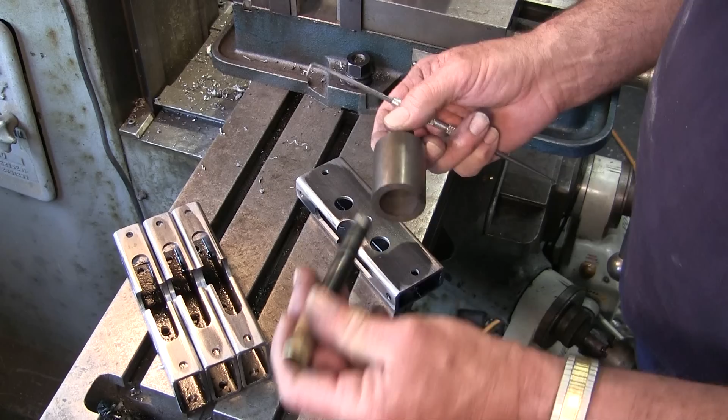Okay, we got a couple things going on here. It's basically a transfer punch with a sleeve I made up for 5/8, and this is a piece of 1.5 that I used for something else, and it just happens to work out fine for us here. What I'm doing is scribing out a line that I'm going to hand sand these to.

We could put these right on a rotary table and over-engineer this radius, which is just clearance for the bearing. The bearing will be sitting proud of the top all the way there, as long as we give the 3/4 inch radius, and that'll be done just by hand.

So to sand all of these, I come in here and scribe a radius up here. All I need is partially on this curve right here, and then here, and then I'll be able to sand that right on my Wilton sander. I'll do one side and then the other side.

What I do is mark these up with a line that I can scribe to. Now I come in and sand one side, flip it over, and do the other side, but I want four lines so that I've got references by eyeball.

So I'll get all these scribed up, and then we'll go into the Wilton, and I'll show you how I sand one in. Of course I've already done one, and this is what it's going to look like when it's all done. Then we've got just some slight deburring on the inside, and this carrier tube will be ready to rock and roll.

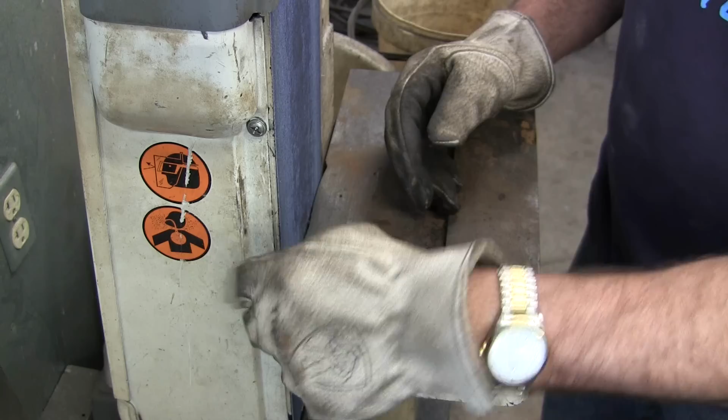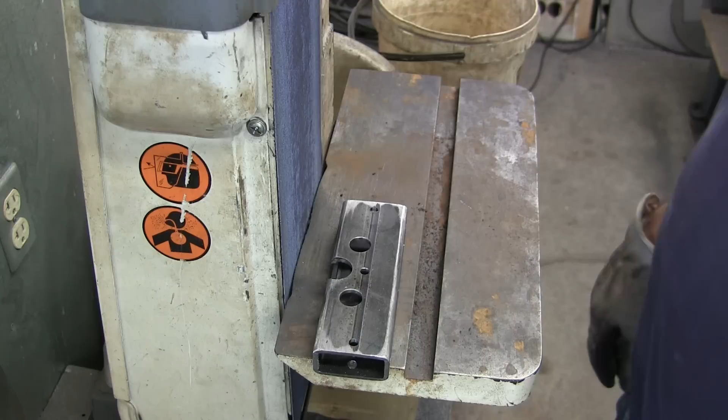We're at our Wilton, and we tracked the belt so that we're all the way over close to this edge here. We're going to take and work in here, flip it, and work until we blend that radius right into our scribe lines, and it looks really good by eye to us.

You hit a little bit there, and then when you flip it over, you're able to reach in a little bit farther for the other side.

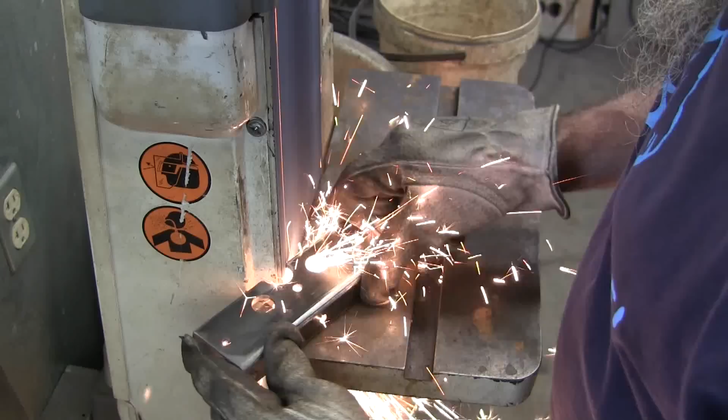You just make sure that you're not tracking too far with your belt to where you're cutting into your side cover.

I don't normally wear gloves with the Wilton here, but the hot sparks and heat of the tube really does get going, so I'm keeping them on for protection here. You can wear gloves or not, it's up to you. It's not always the brightest thing to do, but you know when you're going to get your hands in there close.

Now once I have it like that, there's still just a little tiny peak here and there, and I want to blend those in with the hand sander.

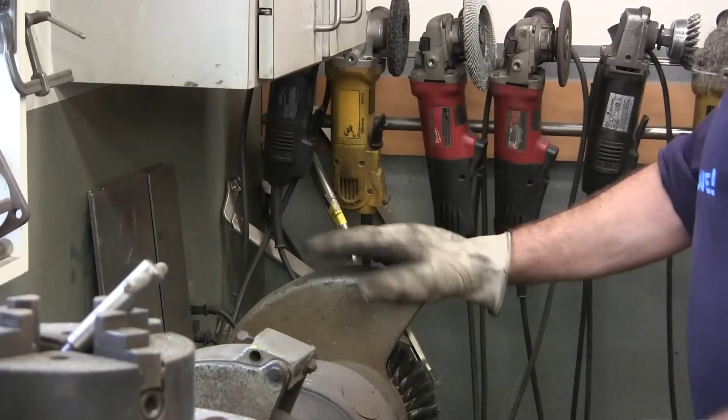Sometimes I use the top of this just for a resting point like this, and I can grab my sanders that I've got over here, and this happens to be plugged in already.

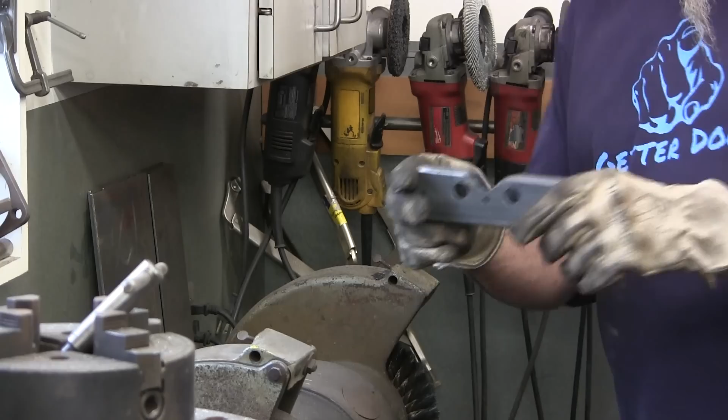Just a little massaging until it looks like a nice curve. Alright, we still got to deburr the inside and that.

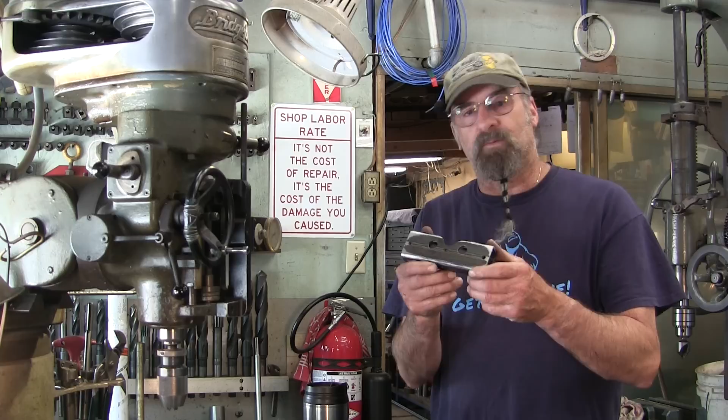We're running out of time. We have a lot of other things coming in here, and we're trying to carry as many jobs as we can, keep things going, but we're still getting ready to send these off to Stan's place there for the summer bash.

All right, I've got a couple parallels in here. I've already kind of gathered up all my stuff to get ready to go here, so I am a little bit prepared, but I want to go through how I did prepare.

We have a couple parallels set so that I got the height. I'm comfortable being able to grab the top of this part with my fingers, and enough is held in there to hold the part. Now we want to hold this off the end there, and I don't have one of the little short block stops that normally clamp on here for a mid-vise stop.

So this stop here is actually set with a rod that's not going to reach all the way over there. What I really like to use, since I've had these, I stopped searching for that little block, because I have various sizes of these machinist clamps. What I do is take the clamp, lay it down, slide it up there, and tension up the clamp.

With the two rods right on top of there, you're keeping it parallel so that face on the end is going to stay square. And then I take one of these screw-in scribes that used to have the end on it, and you snapped off, and I use that to throw on there.

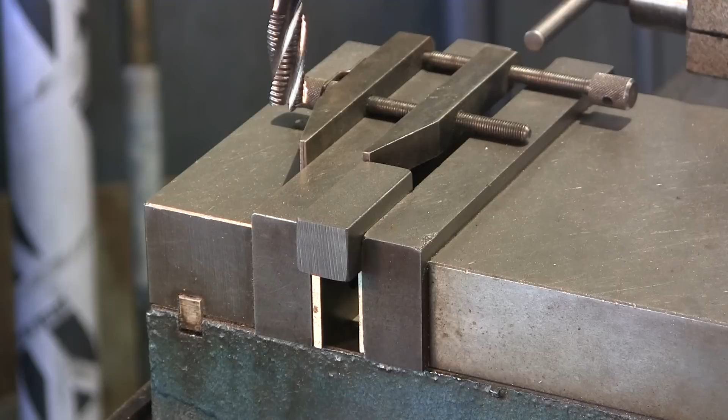That's good. Okay, let's reposition you because we're just going to get in here. We're going to be doing some facing off on these squares here. Okay, we're all set up here now. All right, we're going to turn our spindle on. We're going to come down.

There's 153, 152. All right, so what we're going to do is we're going to touch off. First off, we're just going to quickly measure the one we have in here. And we're about 920. Okay.

So we're going to touch off on it, and we're just going to feed back here. What we're going to do is set it up so we have something we can judge. That was 920, we'll put in 0 here. And let's go ahead and we can take 100. All right.

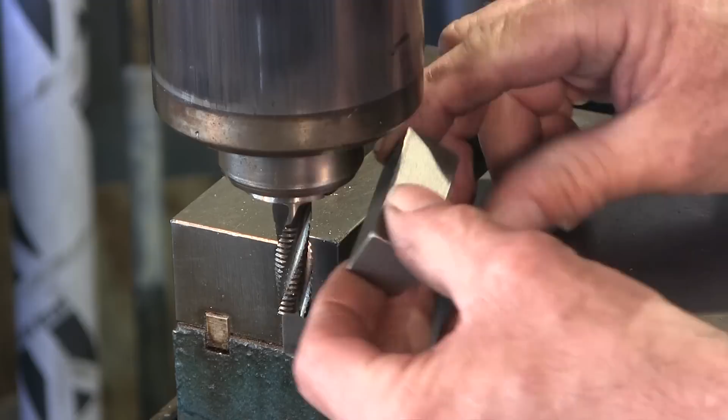So I'm going to run all of these through this process here. Just a little bit of air in there — that's another nice reason to have the springs in there. They hold it when you hit it with some air, so the parallels don't tip over, fly up, lift up, and let chips go underneath.

We're going to continue going through all of these and hitting this one side here. All right, we've got our 12 pieces set up here, with the pre-machined surface all facing up, so that when we grab them, we're making sure we have the finished side here and our saw-cut side out.

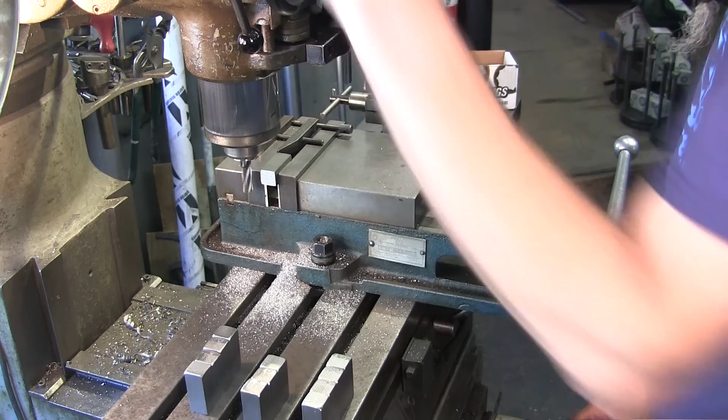Let's go ahead and take a cut, then we'll take a measurement. We're still at that 1 inch 820. I'm just coming in, barely touched it — 820, and we said 825, so there was about 75 thousandths to go.

I'm going to crank in 60, about 10 away from what we project it's going to be. Let's take a cut across here and then we'll measure it and see what we got.

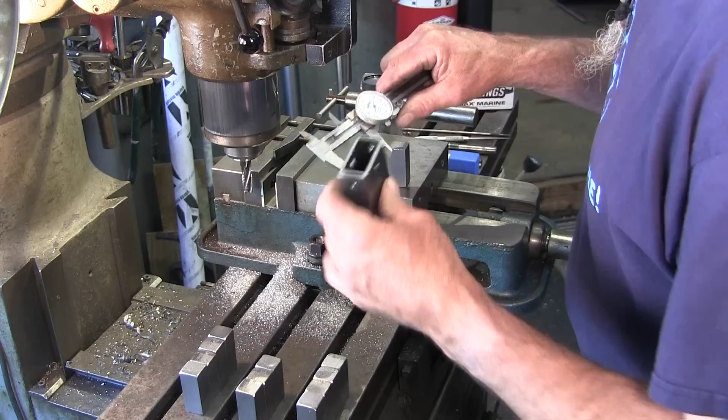We got 1 inch 768 or so, so there's about 18 thousandths we need to take out of here, but maybe not quite that much — this is measuring about 5 thousandths over 1 3/4. I think we'll take 10.

What did we say this was? 8 — let's take 14, we'll see how it fits in there. All right, there's the 14.

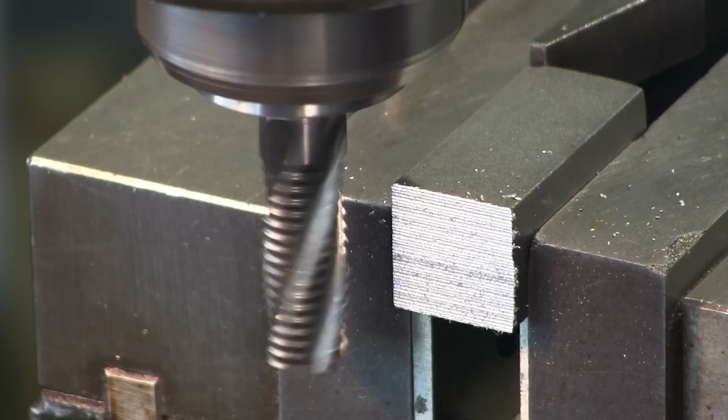There's 754, 754 — let's just see if it fits in there, and I'm getting it to dip in. That's going to be good. I'm going to go ahead and call that zero, and I'll cut them all to that length right now.

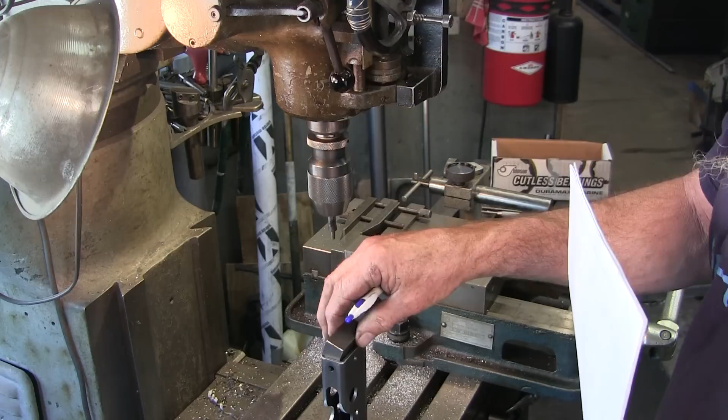We're ready to go for the next operation. They're at length, we get them to fit inside the edge of the box tube here. They don't have radiuses on the corners yet, so they can't slide in there, but we'll do that after we put the holes on them, since we're still using a sharp corner to locate this part.

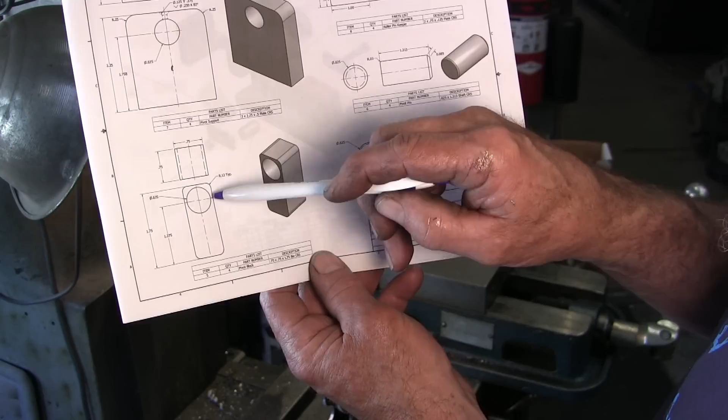We want to put the 5/8 hole that goes through, right here, 1 3/8 up from the bottom, with about 1/16 of an inch of material on each side around these three points. We have to be conscious of our parallels under that part, because that 1/8 inch is going to come down and grab those parallels, so I'm going to push the parallels back in there a little bit.

So it'll still locate the part. Now I'm going to go ahead and pick this up just to make sure that I am back out of the way. And I'm going to go ahead and open this back up again once I locate my hole. All right, now I got a wiggler in here. Let me see. A little bit fast.

Okay, there we go. All right, let's come over here to the back side of this project here. I'm already dialed in 3/8 of an inch in from the jaw face, and we're going to stick the wiggler down in here, and then we're going to go ahead and come out until we kick. There, we kicked.

We're going to zero that, and then do a retest. And it's zero again. Okay, that's a 200 thousandths tip, so we're just going to move it 100 thousandths and then re-zero it.

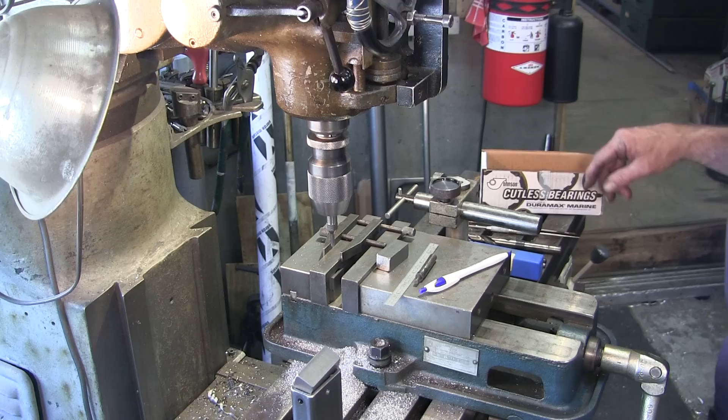All right, now let's go ahead and we want to make sure that we're clearing a 5/8 diameter down in there. I have the clearance drill here, and we can stick it down in. We know that we're about 1/8 of an inch away from our parallels, and this drill bit is pretty close to the 5/8, so we're going to have plenty of clearance there, and plenty of parallel to actually hold that down. The vise is going to hold that thing from twisting and cocking.

All right, now we're ready to go ahead and start putting in our hole in here. And I'm going to go see if I can hunt up my tight reamer again, and if I can, that's what I want to put in there, because to be ideal, the round axle that will go down in there—the trunnion pivot—if that presses down in there, it's going to be a better product at the end.

Okay, we've finished drilling all the 1/4-inch pilot holes, and now we're going to put in the next size drill. We're going to lower the table down here. Okay, and we're going to have to slow down our speed here. I think that's going to be good.

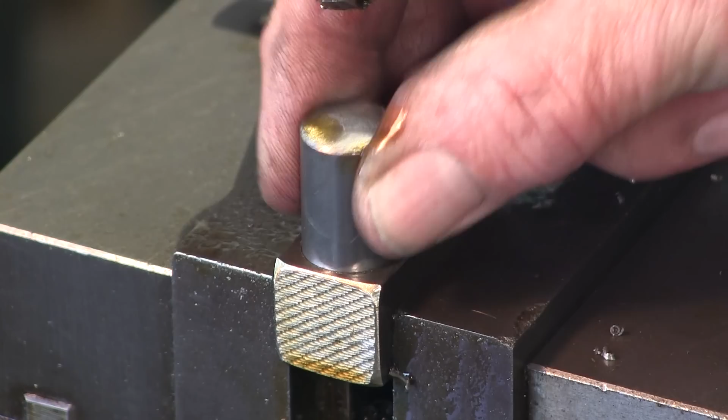Okay, we're over here at the lathe, and this is item 6. There's quantity 4 of them, and these are the pins that go through the block and are the pivot of the main body.

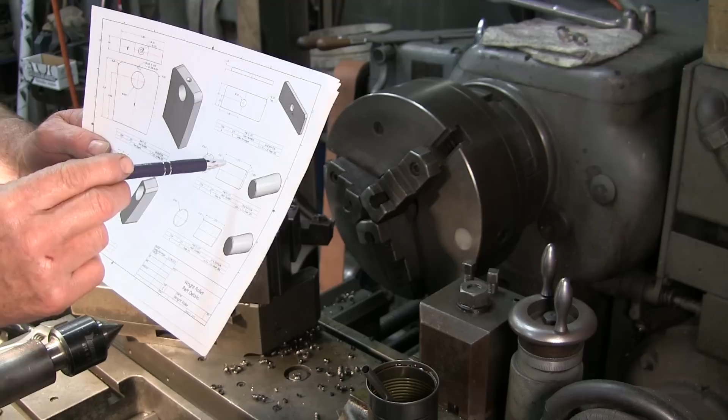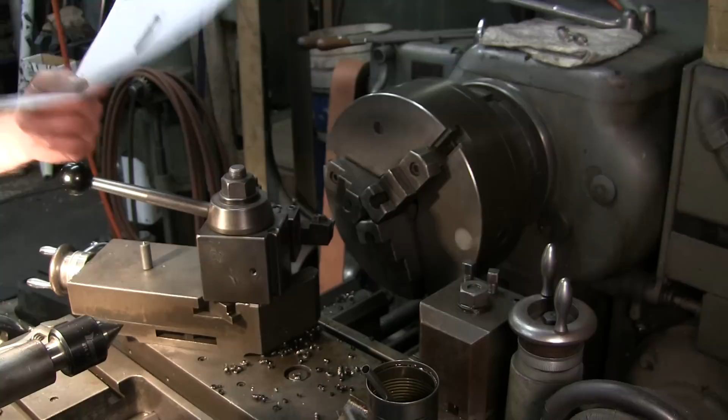In the drawing it does say 1 inch 313. Basically 1 5/16 was what I had jotted down on my print, and these drawings were just taken from my drawings and made into nice SolidWorks type drawings. Right now I'm just taking the rough pin at my length, and the rough length on this group of pins is...

1 3/8. All right, and the way I weld these into the blocks there - I'm going to show you what I do and how I'm going to do it. There's one smooth part on one side of my pins, and then there's one that has a little nub there from the parting tool that's stuck on there. So I take the nice end here first.

Okay, let me zoom you in here. I'm going to do a little bit of work to both ends there. But right now we have the nicer of the two ends on the pin sticking out.

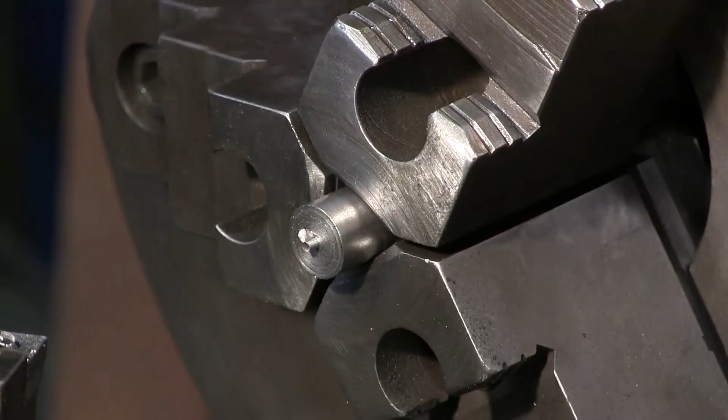So we come in and we're just going to kiss that. It's a chamfer, it could be a radius, it could be whatever you want on here, because that's going to be the inside, the end that I'm going to weld. So it really doesn't matter what's there, because it's going to become molten soon.

All right, now the side that has the part-off, I'm going to go ahead and dress the little chamfer on here. With this up close, you can actually see how much run-out my 3-jaw actually has. All right, so a nice clean face, and we face that nub right off the end.

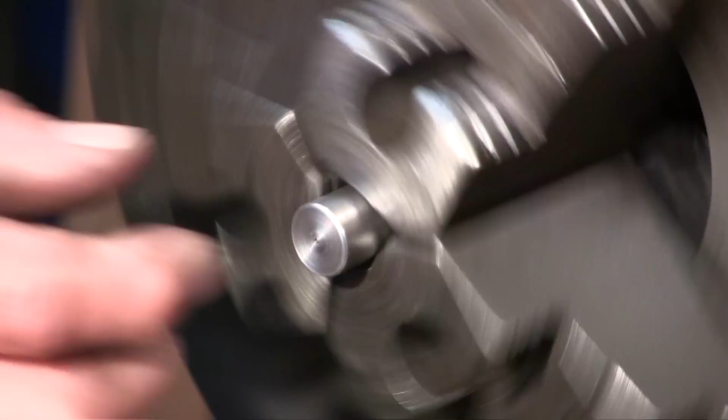And I want to add just a little bit more - I just didn't quite give it enough here. That's just to dress out, because this is going to be the outbound side to the air, but it's going to be sticking through the plate on the end.

So, a little bit of that chamfer is not going to hurt. All right, so we're going to finish dressing off the rest of our pins, and we'll run through another one here real quick for you.

There again, our final length - the ballpark length I should say - is right around 1.350 to 1.375. The setup that I'm going to weld them into the block will make them all stick out exactly the right distance from the tube shape when they're mounted in there. But for right now, they don't have to be that exact.